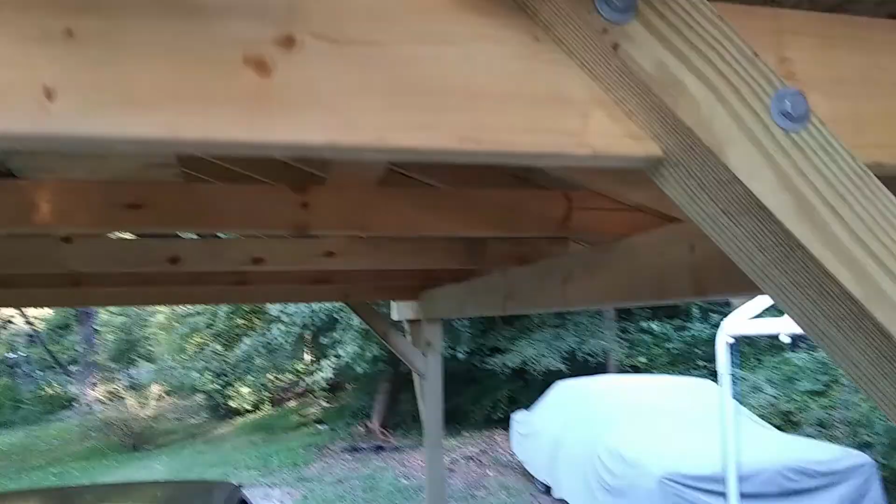Hi, this is my new carport. As you can see, it's relatively small. It's just over 16 feet long and 9 feet between the supports here. It's supported by 4 pressure-treated 4x4s. Of course, it's all wood construction, and it has a self-supporting roof, which leaves an area here which is completely open for storage.

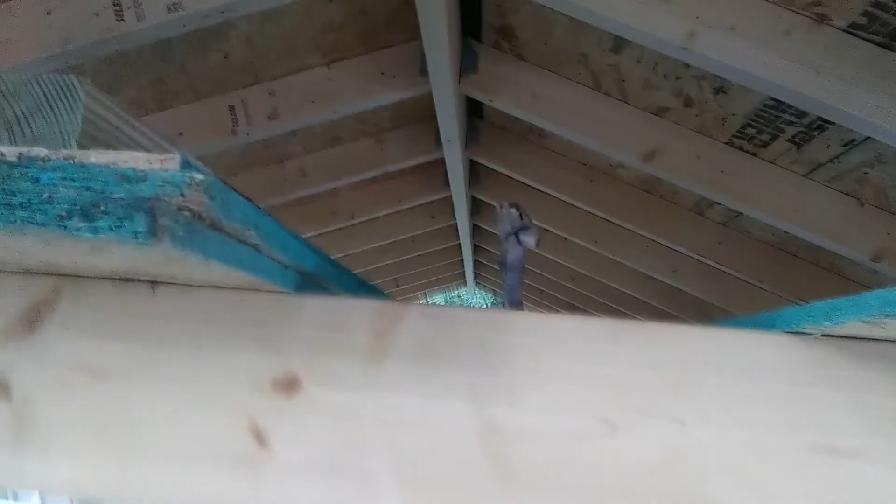But first let's look at the design. Here's the design. This is composed in Blender, which is a free open source program. One feature of the design is that instead of putting support posts in the corners, they've been moved in about 32 inches from the ends. So with a total carport length of 16 feet, that leaves a center span of just over 10 feet.

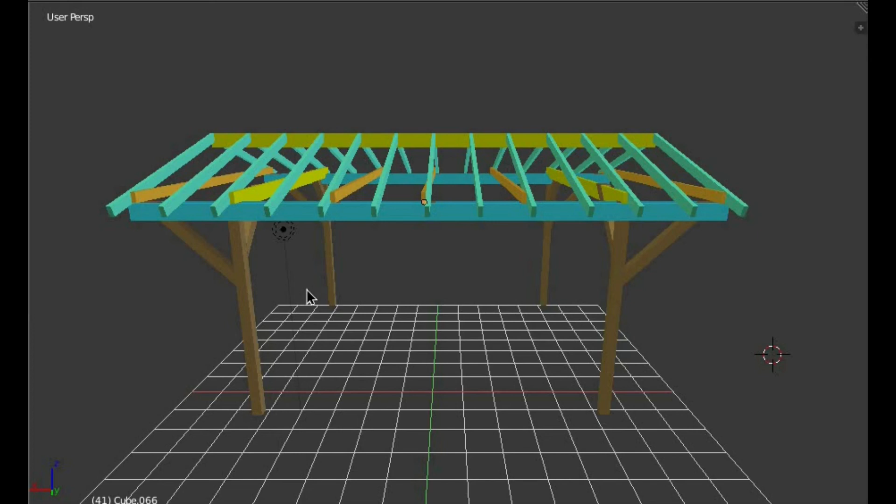And that's short enough that you don't need a support post in the center, which is great because it means digging just 4 footings instead of 6. Also, it means the center area is completely clear for opening the car doors. That way the open doors will never hit the post, even though the carport is only 9 feet wide from post to post. The posts are 77.5 inches tall minimum. The site isn't quite level, so some of the posts will be a bit taller.

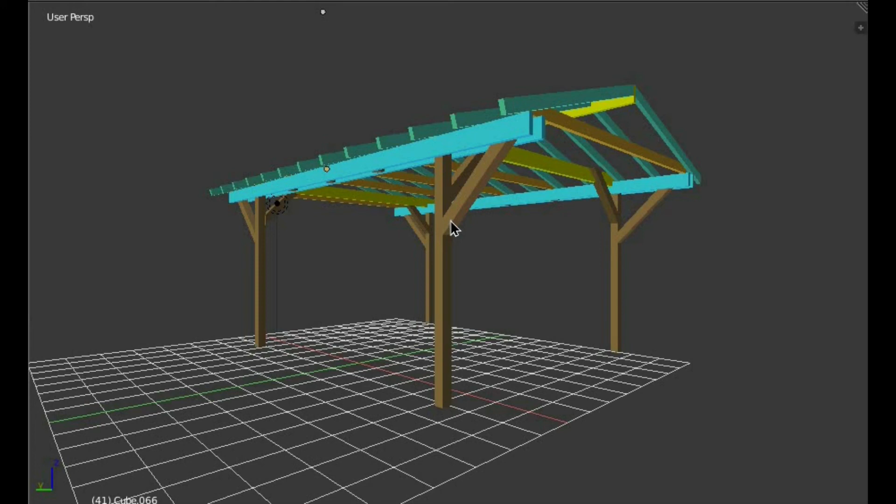At the top of the post on each side, there's a sandwich of 2 16-foot 2x6s. In each corner, there's a 4x4 diagonal brace from each post, projecting outward to almost the end of the beam. These give the structure front-to-back rigidity without obstructing the center span. They also help support the 32-inch extensions at each end of the side beams.

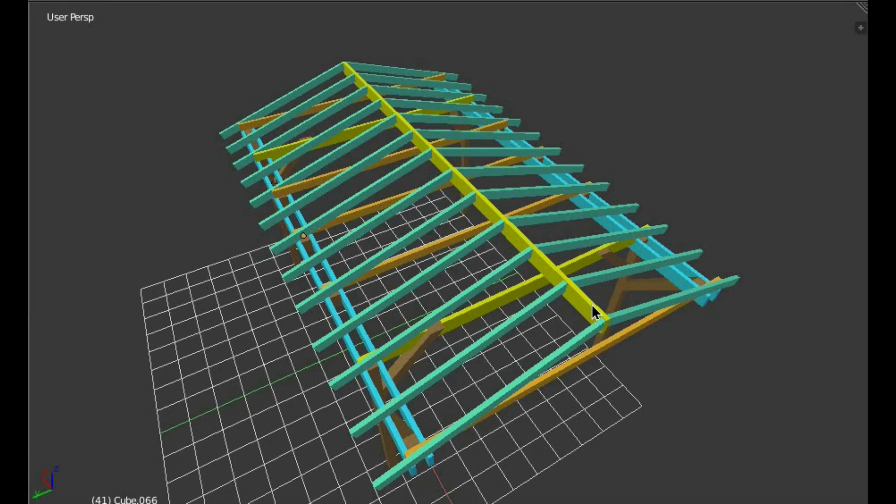The roof is just standard rafter framing on 16-inch centers. Since the rafter span is less than 6 feet, the rafters can be cheap 2x4 studs. The 2x6 ridge is supported by the rafters, leaving an unobstructed area under the rafters for storage. At every second rafter, there's a 2x4 joist to keep the side beams from spreading apart.

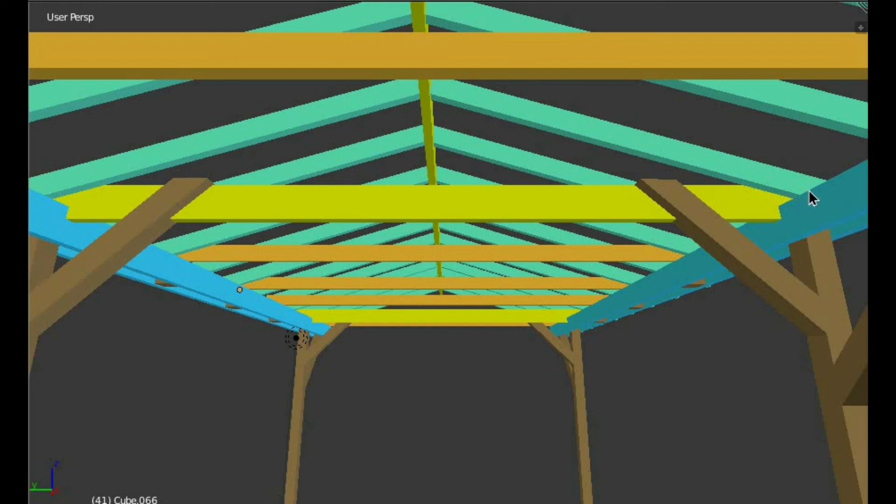The third rafter from each end coincides with the support posts, so that's where we'll put diagonal 4x4 braces between the post and the joist for side-to-side rigidity. We've used a 2x6 joist there to make it more rigid and notched it on each side so that the top of it lines up with the other 2x4 joists. At each end, we start with the rafters on the outside and the joist on the inside and continue that pattern from each end to the middle.

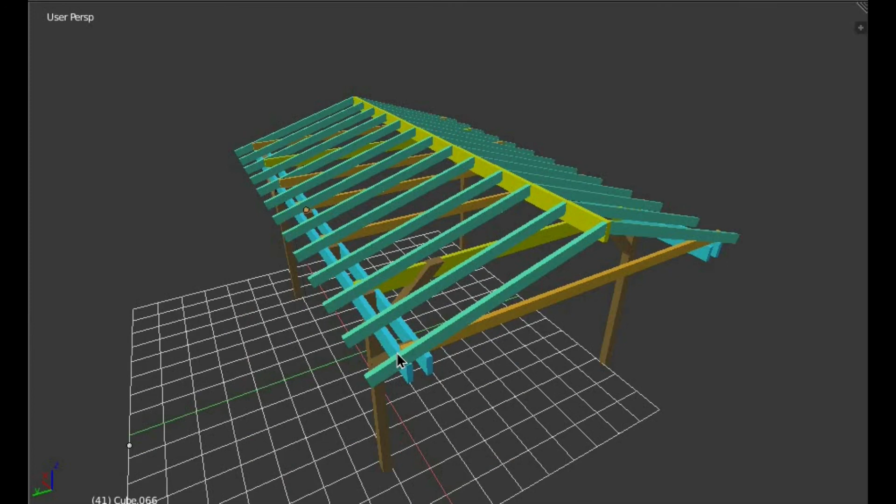The roofing isn't shown here. It's just a standard shingle roof over oriented strand board, but you could equally well use a metal roof. Now let's briefly follow the construction. So here we are with a little more than half of the framing done, some of the rafters.

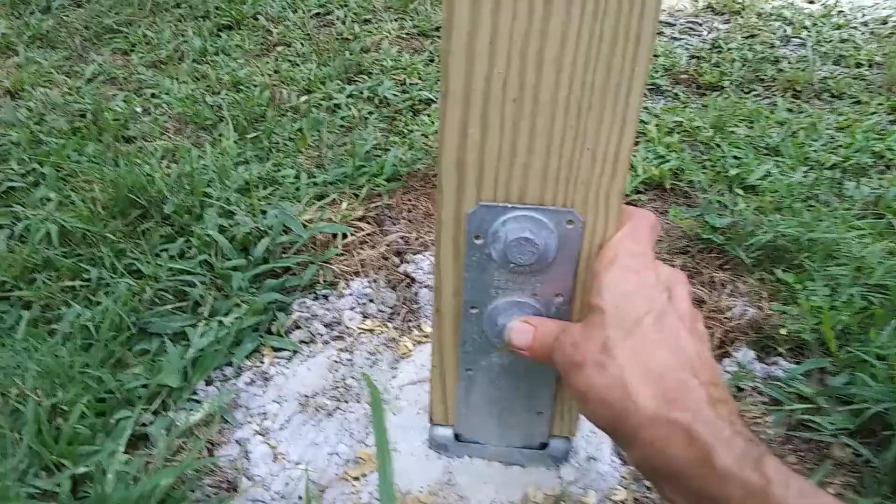So if we look down here, we've got concrete footings. That goes down 18 inches. And then these base plates, these are cast in place. And then 2 half-inch bolts going all the way through. Of course, these are 4x4, and then up the top here we have the double 2x6 beam.

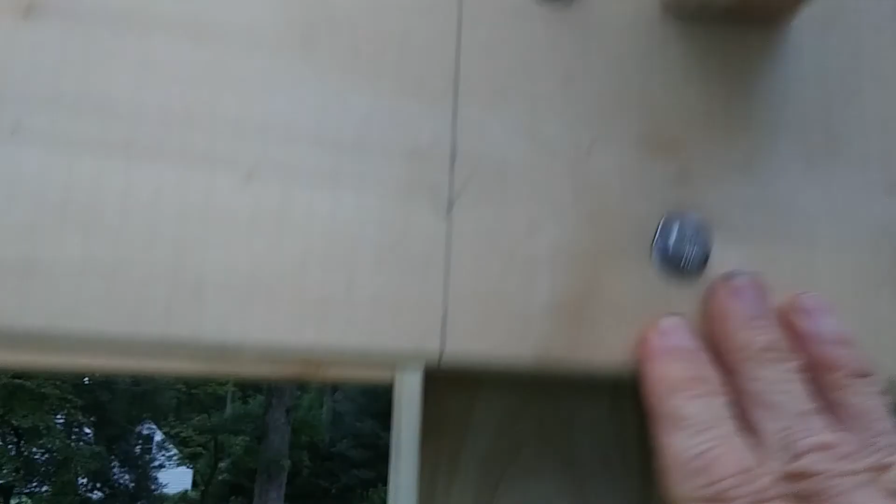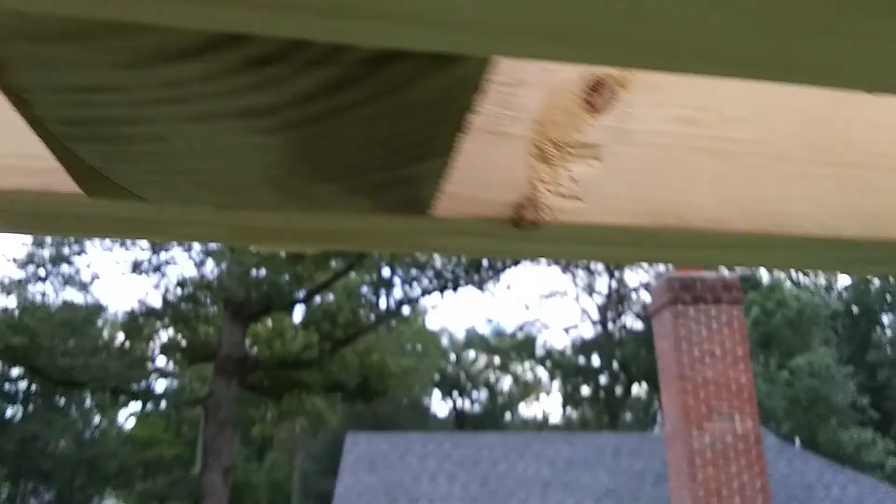That's held onto the 4x4 post with 2 1/4-inch lag bolts. And then we've got diagonal brace here, 4x4. That's held in with 6-inch timber screws. And again, up at the top, 2 1/4-inch lag bolts. And then we've got blocks just to keep it rigid here, 4x4 blocks, full length of the 2x6. That's held in with

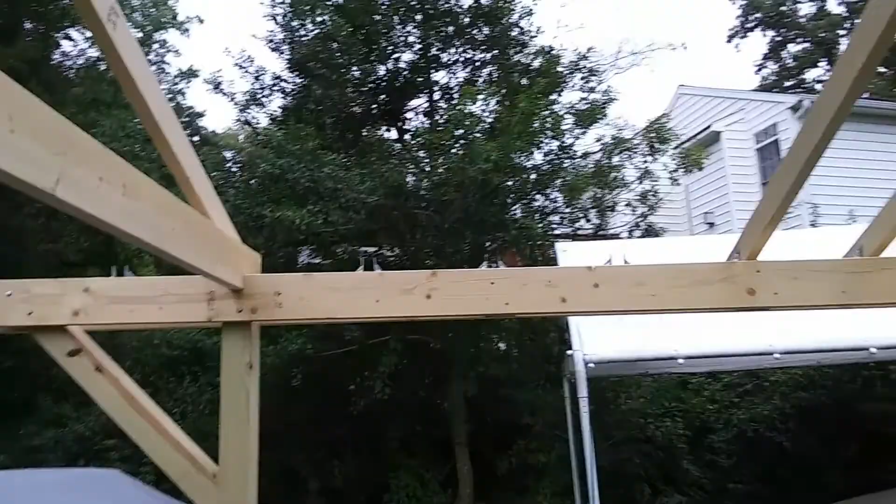3.5-inch deck screws. So to raise the roof, what we did is assemble part of it on the ground. So 2 trusses, that's the 3rd rafter in from each end, along with the joists and the ridge. Build that on the ground and then flip that whole structure up onto the beams. Then fill in the rest of the rafters and finally the remaining joists.

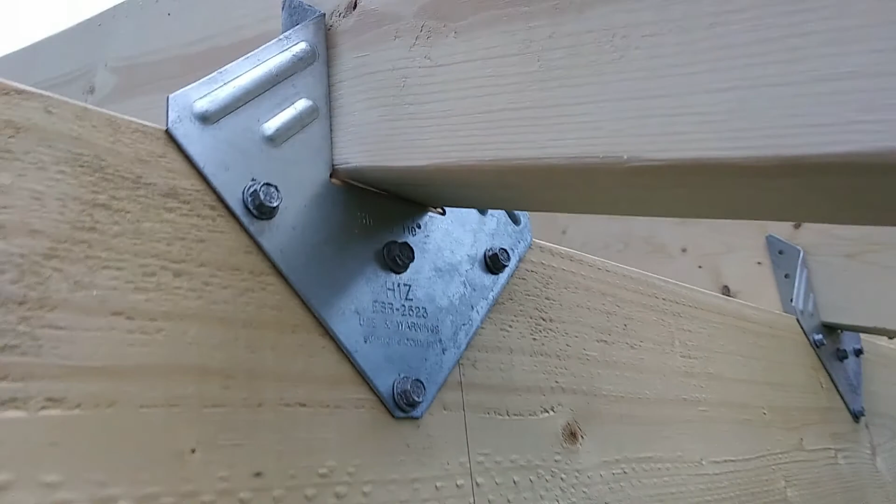Using brackets for the rafters, there's the lower bracket held in by hex screws. And then at the top, there's the ridge brackets.

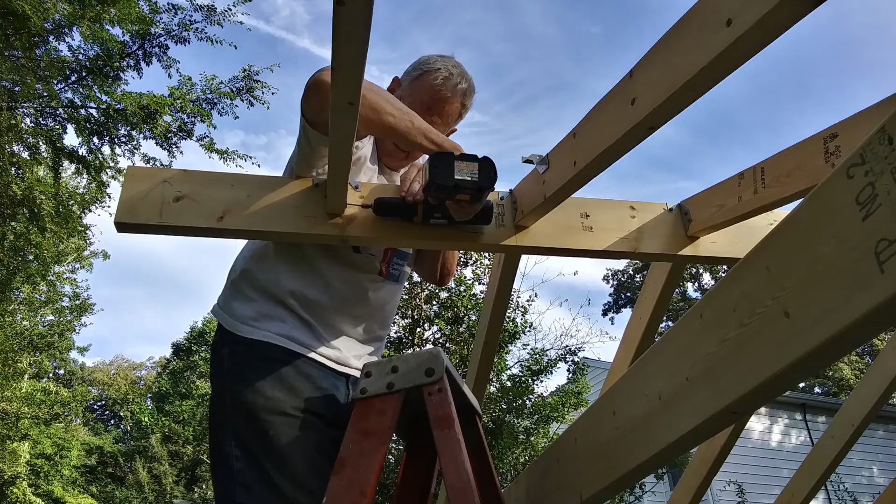So that's about it for the layout. And just have to get those final rafters up. Okay, so nearing completion here. We've got half the roof on now.

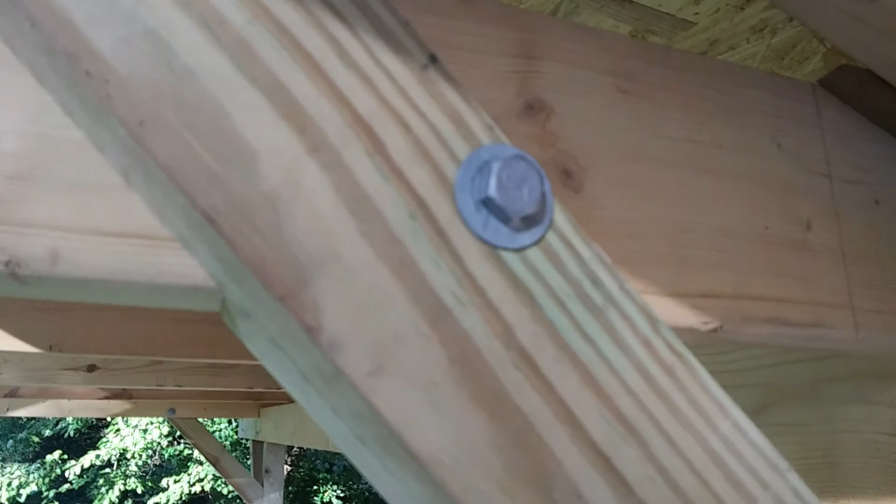Also put on these diagonal braces here. This is again 4x4, held in here by timber screws. And then up here we've got a couple of bolts. Probably a little bit bigger bolts than we actually need. And we had to make a rabbet in the 4x4 here to mate it to the 2x6.

To make the rabbet, we cut a bunch of parallel strips in the 4x4, 1.5 inches deep, and then knock those off with a hammer, and then smooth it out to an even surface with a chisel and a rasp plane.

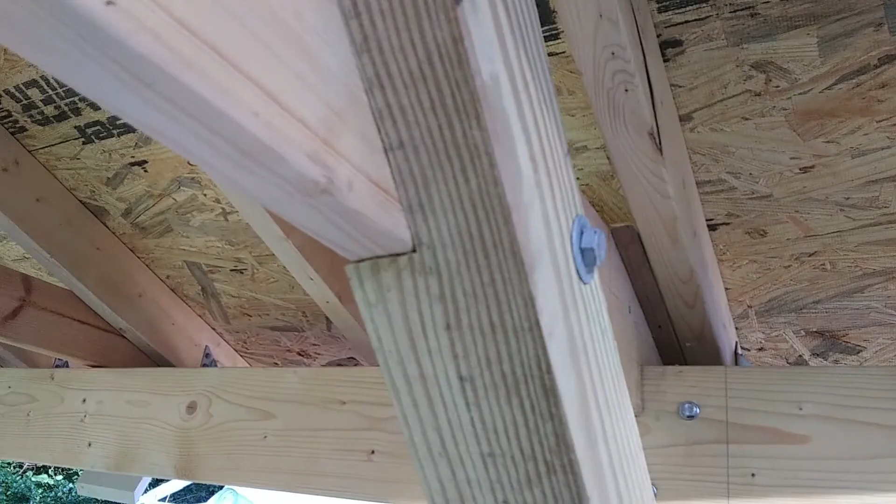And then the roof, we used OSB, oriented strand board, and we got the 4x9 foot oversized pieces. That gives us a little bit of an overhang, 1-inch overhang on the end here. And so with a 6-foot rafter, we need just 4 foot and then 2 foot. So just cut one board in half, use the other half on the other side. So a total of 6 panels of OSB.

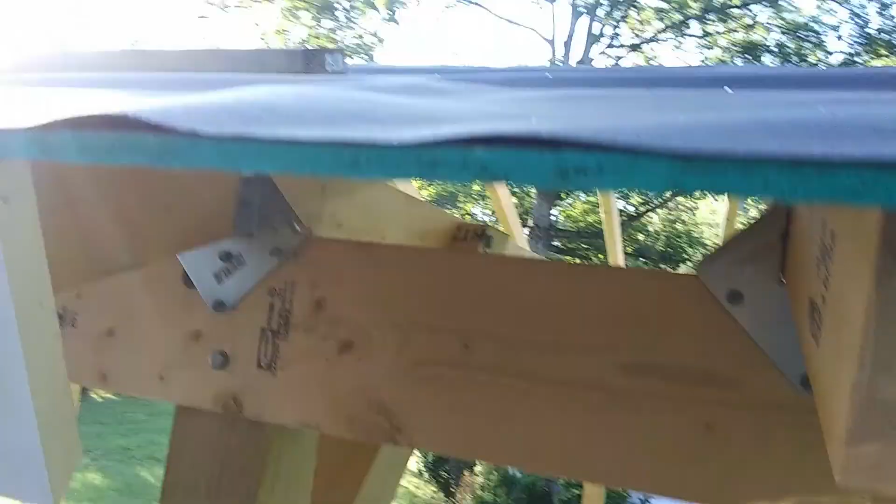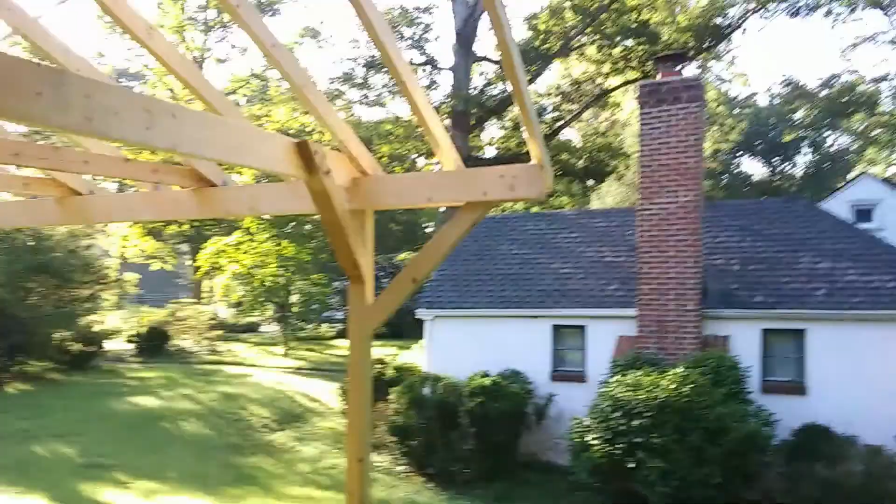To mount the OSB, put a little jig on some of the rafters here, just a piece of 3/4 inch and then 3/4 inch, just to hold the OSB in place until we nail it down. And for the underlayment, just using regular felt paper because no gutter, so we're not going to have any problem with ice dams. So just went with the plain tar paper. So needed 3 sheets of that to cover the roof.

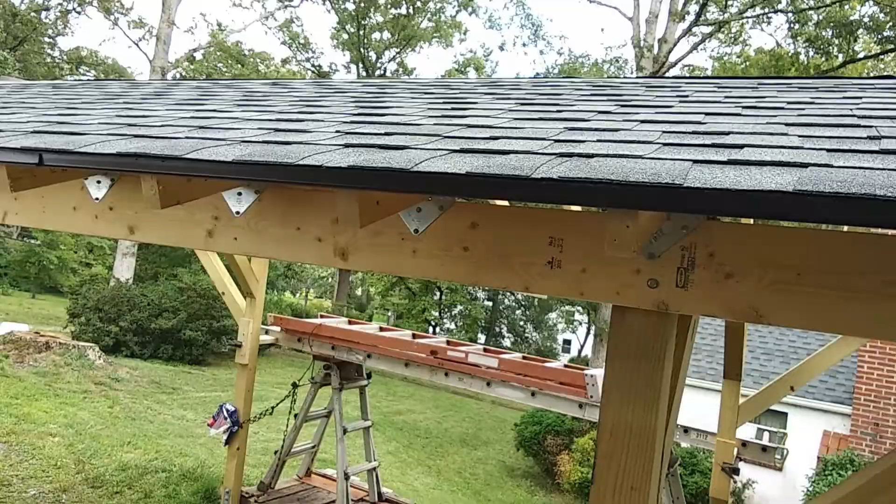Okay, getting close to completion here. We've got half the roof done. Could have done a metal roof, but decided to go with the shingles to match the house. And these are just standard GAF Timberline dimensional shingles. And we use starter shingles and drip edge all around the edge, because the OSB is susceptible to water damage, so want to be sure to keep that dry.

And we're about to start the other side here. And since this is right on a bank, had to make a platform for the scaffold with some pallets. And then we got the scaffold clamped to the post here, so nice and solid, can't move, and clamped to the ladder there so it can't tilt back and forth. And ready to finish up the second half of the roof.